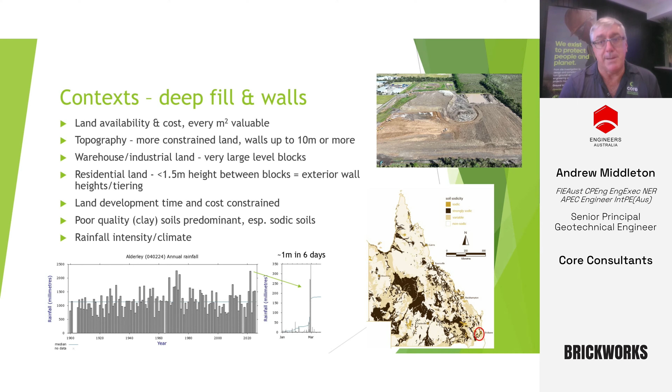With infill, typically you're building to your boundary, and we find that the land the toe of the wall sits next to is your neighbour's, not yours. So for walls in cut, the toe of the wall sits in your land — in both cases it's in your land — but in the case of cut, the land below the wall is yours, whereas in the case of fill, it's not. This changes some things that you, your client, or your owners can practically manage in the future.

So the types of walls we typically see used are cantilever, sleeper, or post and panel. Obviously panels are becoming more popular than sleepers. More traditional, I suppose, is the cantilever concrete footing with blockwork or bin sill systems.

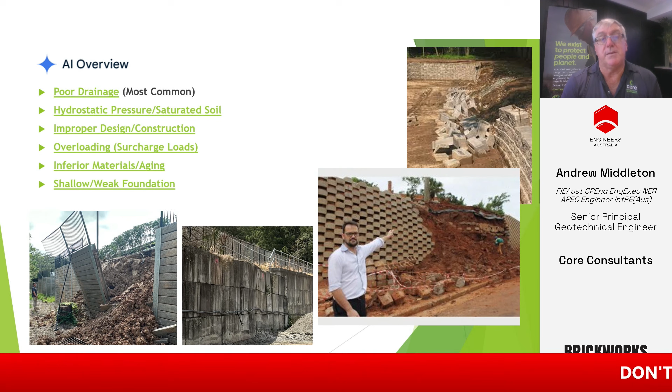So if you want wisdom, you just go to AI, of course. Here's a summary of what the internet says — poor drainage, I won't read them all out, but at least half of the causes are related to water, whether surface water or groundwater. Then there's design and overloading, whether intended or missed in design, and materials. Typically though, water is by far the major cause.

You can see a couple of little failures there, and that gentleman — actually not from Australia — is a politician, and you can see he's educating all of us about a big wall failure. Slow news day, perhaps, I don't know. Anyway, it will make the news, and we don't want that to happen.

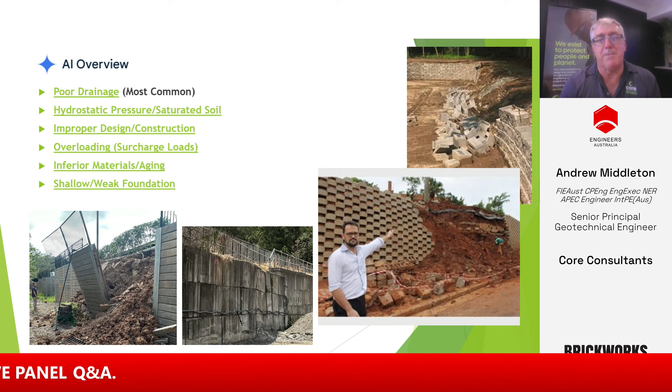Wall design is not simple, it's not easy, and it includes an interaction between both structural elements and soil. It's quite a significant bit of engineering work, and as you get big walls, you get very, very big loads. I think these are amongst some of the most significant engineering structures that get built.

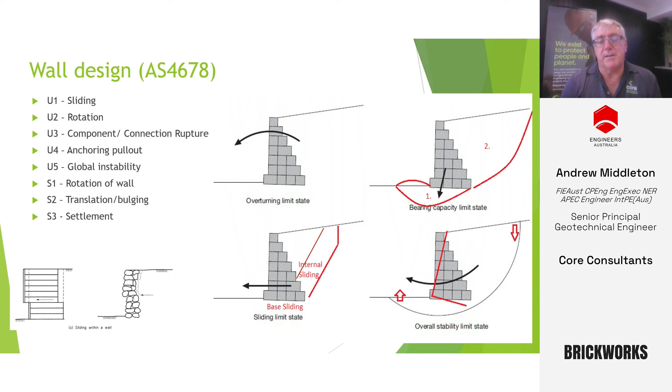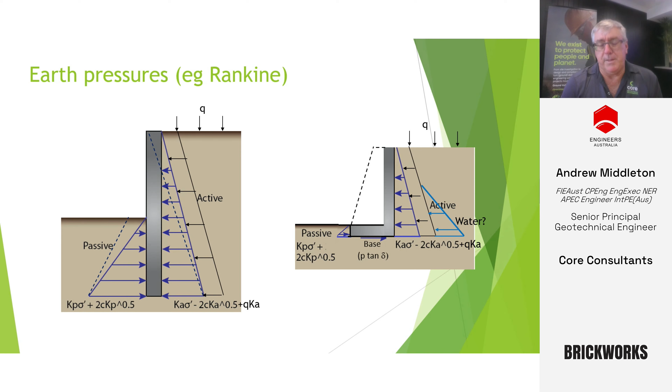Again, just basic earth pressure theory — passive pressure on the leading side of, say, a cantilever wall, and active earth pressure on the back, provided the wall can move. If the wall's restrained from moving, you'd use at-rest pressures, which are higher. There's an increase due to surcharging and whether or not there's water. At a high level, typically for mass gravity type walls, you've got sliding to consider — nothing new there, just a summary of what we've got.

One of the things about FARs is we often get to do testing, and my guess is it's 10 times the testing you would do for the original investigation and design.

As I say, we have to be careful about judging others in retrospect, because with the benefit of both hindsight and lots of testing, it's easy to do that.

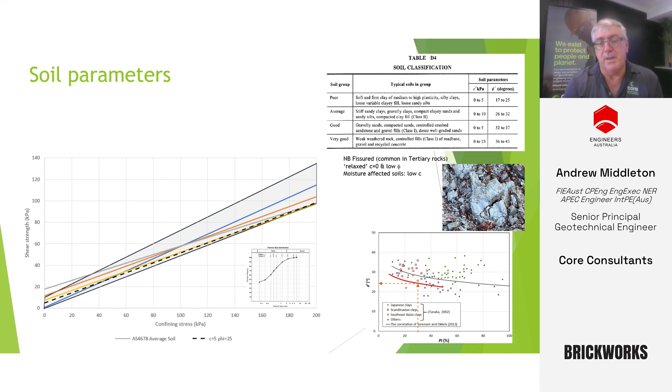Of course, the benefit of high soil suction is it gives you high apparent cohesion. A lot of embankments and cut slopes stand up in the short term because of these suction pressures. But as water becomes available, the suction will draw in water, dissipate, and there'll be a loss of that apparent strength, apparent cohesion - you need to account for that.

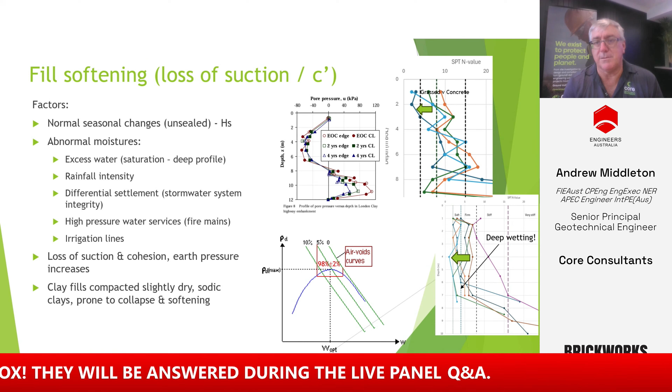Fire mains are a major contributor to problems in clay fills. Again, differential movement as earth pressures take up potentially leads to that. There are circumstances where there's been unmonitored water use in the fire mains and significant volumes discharged over a period of many weeks, and it only became evident when the wall had a problem that something was going on.

As I've said, with increasing moisture, you get loss of suction, your earth pressures go up. You need to either reasonably allow for that or try and ensure there are measures in place so it doesn't affect it. I've mentioned the clay fills, sodic soils.

What was also really useful is they monitored, they took readings as a very diligent client wanting to ensure they didn't affect their neighbour. We found it was about 100 days for those movements to fully develop - that's the dissipation of the soil suctions. In terms of earth pressure theory, that's the development from at-rest pressures up towards closer to the active pressure, and that's the wall taking up and the soil relaxing.

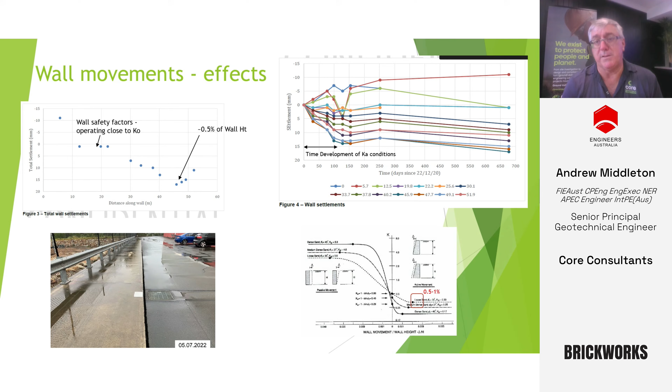So this has been really useful to show us that walls shouldn't move more than 0.5% because of safety factors, but they can move up to 1%, and that's a real number, and it will happen. Occasionally, because of suctions being maintained, you won't see very much movement. You get comfortable with that, but you need to be aware that they do happen. It's a real thing, so if we put it that way.

And of course, with movement, stormwater pipes are prone to movement, fire mains too - we're going all over that. Stormwater pipes are obviously bedded with bedding gravel and they're large diameter, so they are great big subsoil drains. So we strongly recommend using an ag drain in the bedding gravel that discharges into the access pits at the end to the shafts.

Blinding of that layer - I think I would probably, if it was a high risk situation with the potential to affect a wall, I would recommend blinding as well, just to help do everything you can to mitigate the risk of movement causing opening up of joints.

So remember, vertical settlement will happen anyway - that's just normal. Well compacted clay fills settle upwards of 0.5% of their thickness, potentially up towards 1% of their thickness anyway. If the shaft's bedded down at a different level to the pipe, you're going to have differential movement.

So the other thing is the potential to use smart technology to monitor water use and have some sort of alert system. Maintenance people aren't necessarily aware of why this would matter, but having alert systems that indicate, say, a fire system or an irrigation system is using an unusual amount of water, and that going to people who know what it means, investigating those issues quickly and promptly and dealing with them.

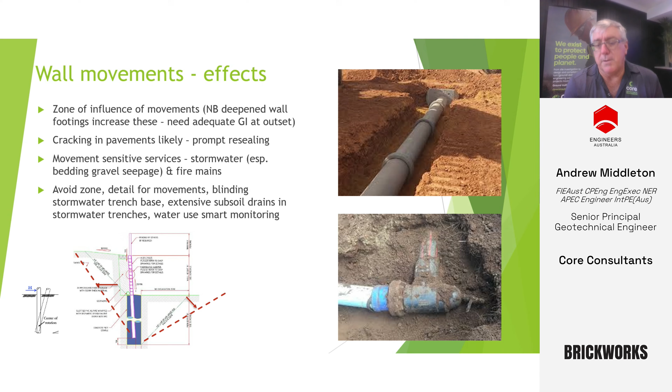I think the other aspect is ensuring when there is movement at the surface, those joints which might be in pavements or opening up of joints in concrete, that those are promptly dealt with.

It's quite popular to adopt this system where there's a facing rock, which could be cut sandstone or boulders laid in a compacted and neat way, but then to substitute a backing rock behind that. The idea being the backing rock provides a lower pressure than the soil, and it helps resist sliding. It provides mass for overturning stability.

It becomes really critical once you get up above the size of blocks - sandstone blocks or boulders - that you can practically manage with most machines, and given the constraints of construction site access and truck movements, once you get over about 4 to 5, maybe 6 metres, we find the statics really start to struggle, and you've got to do other measures, or really carefully engineer and think through how this is actually going to work.

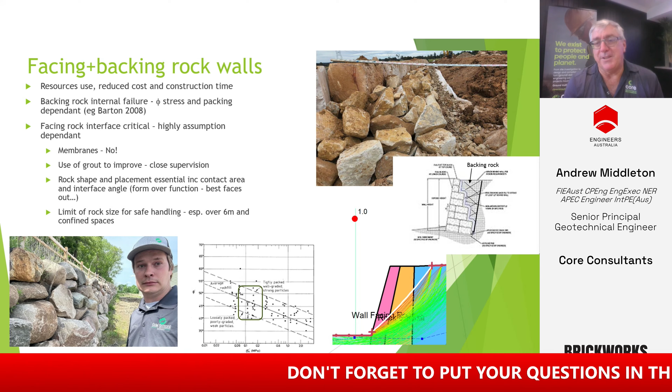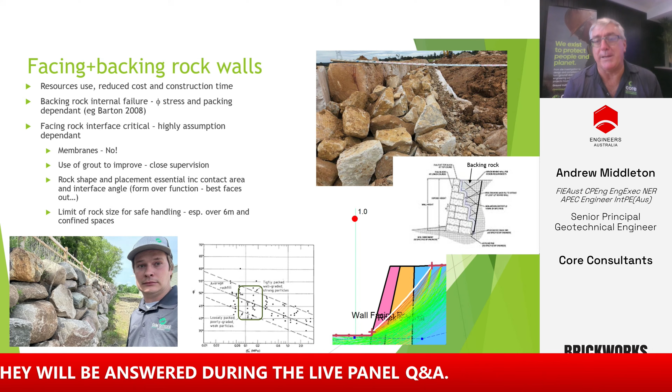There is an example I have seen where a geomembrane, HDPE, was placed between rocks. I probably don't need to say, but friction doesn't work very good on HDPE. So I think that was kind of an obvious one, but nobody picked it up, and of course it was found out first - rain found that one out pretty quick. Fortunately, during construction, it was never going to last. So simple things like that you would imagine are obvious, but maybe not so much to others.

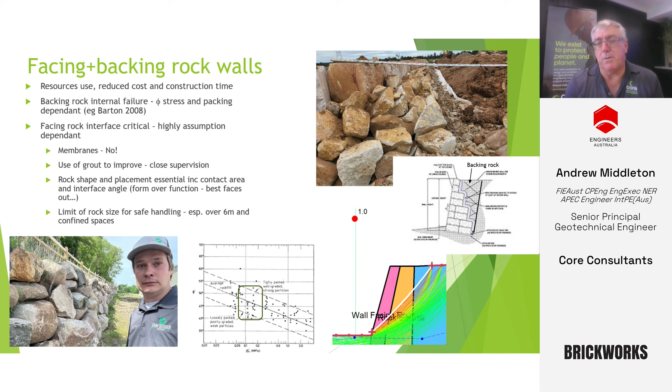I've also just shared - I found Barton produced a good paper on rock fill density and friction angle. It shows some variation for different confining stresses, so obviously you get higher stress. This is from rock fill dams. I found that quite a useful way to have a more informed decision about what parameters you should use if you're going to use this rock fill method.

I mentioned settlement - this is one of the serviceability conditions. We see this a little bit more often than we really would like. Typically, this is a circumstance where we've got a hard structure like a stormwater treatment, detention, or treatment tanks, or access shafts in a smallish gap. Around shafts, we can't put obviously large machines, so we're using small compactors. Productivity of those rollers, you can imagine, is not high.

Obviously, very strong preference to use fill on the dry side of optimum because it's easier to compact. You can see there's an example showing where the permeability of that fill rapidly increases once you get up around that 10% voids, which is what you're looking at if you accept 98% with a -2% moisture. You're probably talking those kind of numbers, and you see how rapidly the permeability changes after that.

Sodic soils are especially sensitive to this. They will also do that.

On the right there, you can see a real project where settlements are - that's a long time plot. You can see it's perfectly, after an initial period, perfectly tracking for a long time, a creep settlement behaviour. It's in a pavement. That's obviously taken some management for that, but it's heading for 20 years for a pretty good size, so a fair bit of asphalt will be needed there.

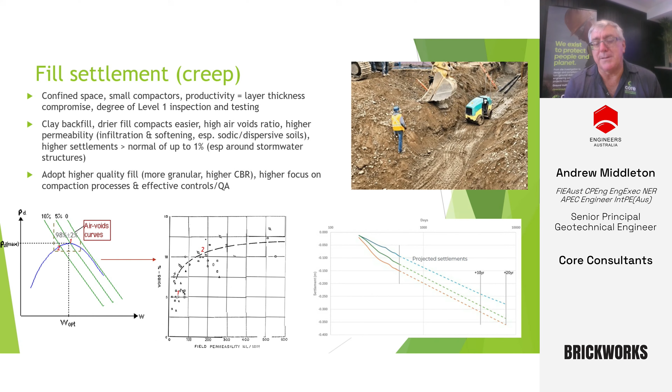So most walls, big walls particularly, are probably going to have a sag point. That's just following topography - there's going to be a low point somewhere on the site, and that sag point obviously is probably not going to be available to stormwater infrastructure, because you're draining the top of the site, not the bottom. So where does that drainage water go?

Discharging it out onto your neighbour's property is a bad idea, but that's what we see a lot. Allowing it to pool in there, down at that level, that's not a good idea either. That allows softening of the subgrade.

There's an example there of quite a well-built wall, but unfortunately the subgrade conditions, clay, after being saturated for quite some time, just eventually gave up and had a simple bearing capacity failure because there was no proper treatment or understanding.

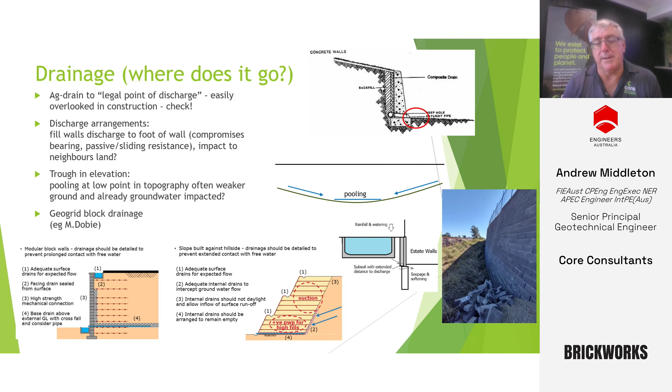The ground hasn't failed as a result of the ground capacity. So I think the issue we're starting to see is, a bit of theory on lateral capacity of piles: short pile failure is where the ground capacity governs. Long pile failure, this is Broms' theory, is where the moment capacity of the pile is the governing capacity, and that's where the pile yields in moment.

Commonly 150 or probably 200 UCs are used, maybe in a 450 diameter pier. The bending capacity of those is very low. And if you then apply that into Broms' long pile theory, you're going to find that the capacity of that pile is very, very small compared to the earth pressures.

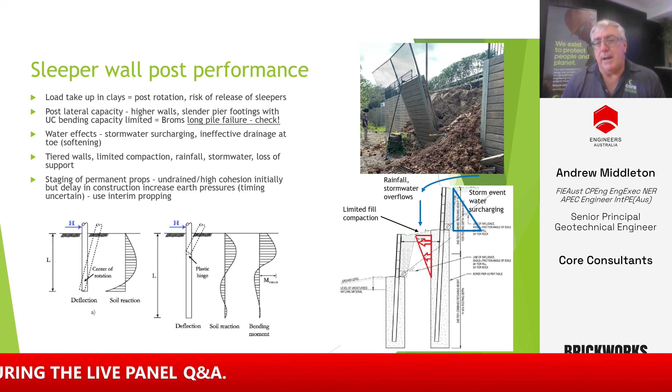Where that starts to become even more of a concern is in a tiered wall, where the upper wall's doing a lot of work and may not be getting a lot of support from the ground, the backfill behind the lower wall may not be very good. You can imagine what happens: the position of maximum moment moves down, the moment goes up because you've now got a longer moment arm, picking up more earth pressure load. Things could go bad quite quickly in that respect.

I'm not a structural engineer, but I really think there needs to be more thought given to full cage reinforcement for these piles to significantly increase their capacity.

Tiered walls, the other thing we have seen is stormwater. A number of these walls have problems during construction, often because of uncontrolled discharge of stormwater going to the walls, down the back of the wall. The drainage systems behind the walls are designed for seepage, not for stormwater.

Secondly, for example in a tiered wall, if it overtops, you're softening the ground in that middle tier, which again probably hasn't been able to have very high or effective compaction. So I'd say with tiered sleeper walls, that upper tier particularly, don't miss it. Really need to engineer that really well to account for these kinds of conditions.

One other thing we have seen is a situation of a cantilever wall which has a permanent prop in the form of the slab for the structure, from the pavement, using it as a permanent prop. But in the interim, during construction, there was no prop applied. As delays in construction occurred, the wall moved well beyond its capacity, the cantilever started to move, and emergency propping was needed there. I think, to me, if you need propping, you need propping.

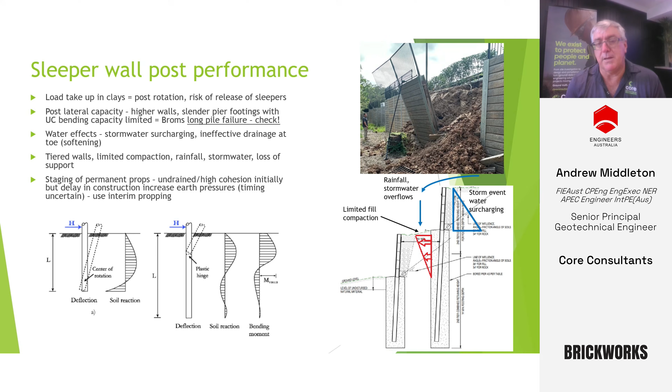So just in summary, things I think are just better practice principles. Drainage: understand where it goes, make sure it gets built properly. Don't just say, don't have a lack of diligence about that. Really, that's such an important factor. It doubles the load on a wall. Earth pressure combined with water pressure is the same as, probably more than, earth pressure in some cases. So make sure you get that right.

Water services are critical, particularly fire mains and major stormwater. They are high risk. You need to make sure those are really thought about in detail. Move them away if you can.

If you can't, put in these other measures. Surface water during construction, as I've said, you must divert surface water. It must have arrangements to avoid the walls - walls are not intended to cope with that. Sleeper walls, long pile failures, as I've just said, check them out. Make sure you're comfortable that you've got that covered.

Tiered walls, obviously numbers of issues there, potentially things that you can't control, need to be kept in mind. Rock walls - the facing rock method - I think practically there's probably limits to what's doable with what's sizable, after which I would probably say think about going to engineered type block systems, GeoGrid for example.

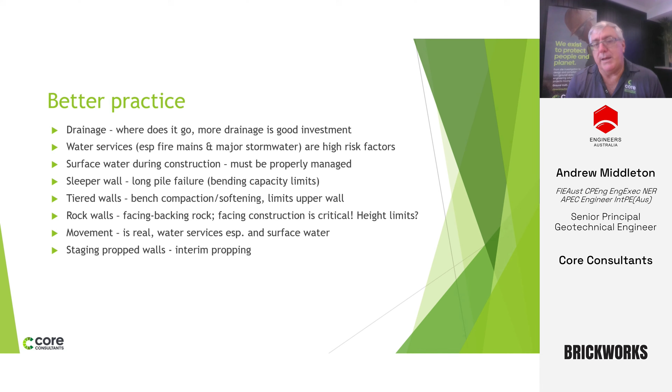Lateral movement is real, and again settlement, compaction - looking at what you do to try to help ensure you've got better compaction around structures when you've got the wall and near wall, particularly back of walls. And again, the staging, as I said, interim propping.

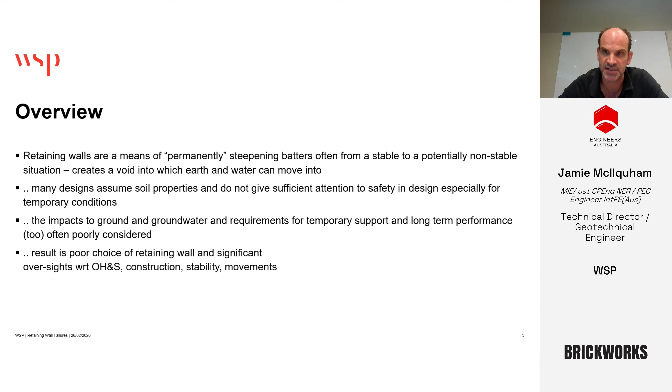So just as a general overview, retaining walls are constructed to permanently steepen the ground. In doing that, we can move ground from a stable initial state to a non-stable situation, because essentially we're creating a void into which the earth and water can move. Now, many designs have to assume soil properties. Some don't give enough attention to safety considerations, particularly for temporary conditions where walls may not be the permanent structure. The impacts to ground and groundwater from temporary or even long-term support are often not well considered. The result is people can make a poor choice of retaining wall, and sometimes design can have oversights in terms of safety and construction - the key things being the stability and movement of the excavation.

Now, there are different retaining wall types. Andrew has already covered some embankment walls, where we're generally building up from existing ground. I'm going to focus a bit more on excavations, where we're cutting down into existing ground. There's different considerations for both wall types. For fill embankments, generally you have more control about what the wall is being built from, and so potentially they should be easier than cut excavations. However, even for low height walls, you do need to be careful to give them the attention they warrant, because you can still cause some major issues, as Andrew's discussed, with embankment walls.

For cut excavations, there can be issues - it is a relatively high risk construction activity. The material we're retaining is going to be variable. It's natural, we won't know perfectly what's there, and the properties can change with time. We do have to often deal with groundwater, which poses challenges, and we'll go through some of those considerations later in this presentation.

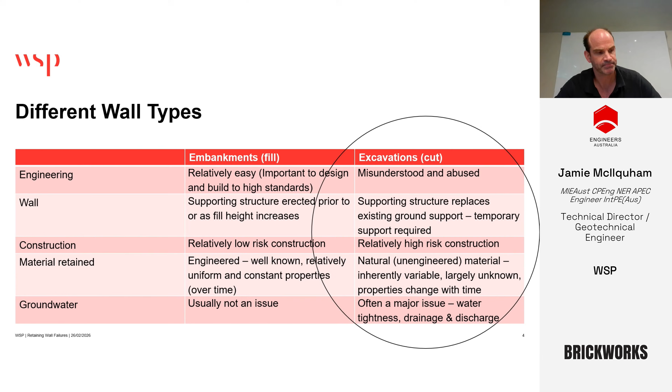There is very good guidance for embedded wall design. CIRIA 760 is a very good reference for anyone working in this field, and will cover in great detail a lot of the considerations I'm going to walk through in this talk. So I'd certainly encourage anyone doing this type of work, or who wants to do this type of work, to obtain and work through that guidance document.

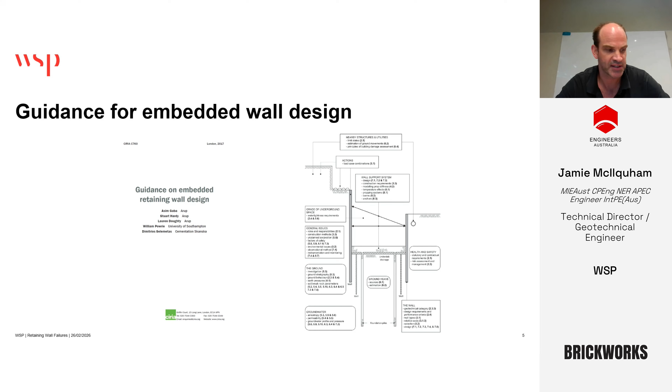As we've touched on already, embedded walls are a risky business. You are creating a void where the soil and water can move into it. Some of the failures that have occurred include partial or full collapse of the excavation. There can be movement of the wall itself, and then if there's any structures or services nearby, they can also move. Groundwater inflow, depending on the ground you're in and the type of wall used, can be pretty serious. And if water does start changing and you have an impact on the groundwater regime outside the excavation, that can then cause other issues for any nearby services or structures. The forces involved are very large, and there's significant consequences if we don't get it right.

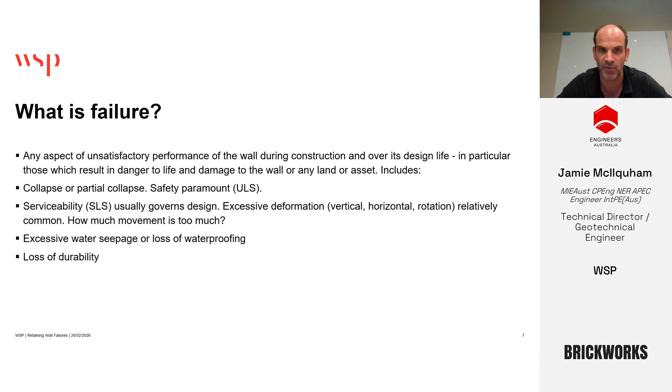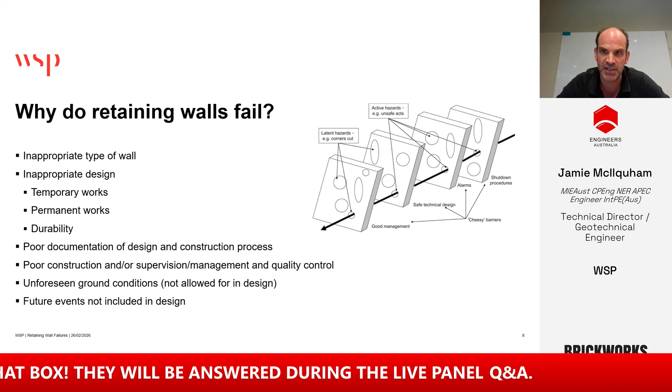So some of the reasons a retaining wall might fail, from a high level, would be an inappropriate type of wall chosen for the scenario. It might be a poor design, either for the temporary or the permanent works. There could be durability issues with components used to make the wall. Sometimes there could be poor documentation around the design and/or construction process, poor construction practice or poor supervision and quality control, potentially unforeseen ground conditions that haven't been allowed for in the design, and finally things could happen during construction or operation that haven't been allowed for in the design process.

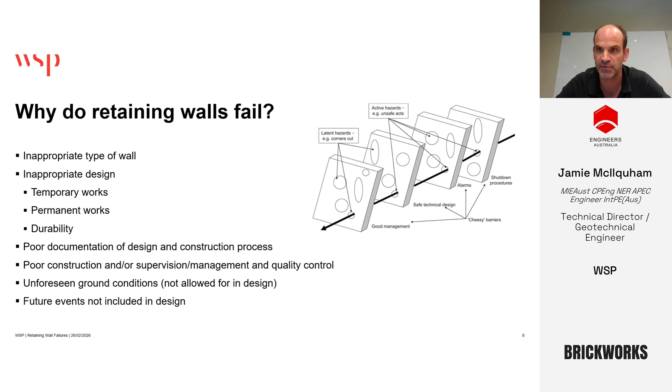Now, some of the things we do need to consider when we're choosing which retaining wall to use: the design function or requirements. Is it a fill embankment? Is it a cut that we need? What durability requirements do we have? Where's the wall located? Is it temporary or permanent? What design life are we trying to achieve? The stiffness of the system, how can the wall move and what impact do we need it to have on nearby assets? And water tightness, so what are the requirements for that? Where is the groundwater level and what do we need to do?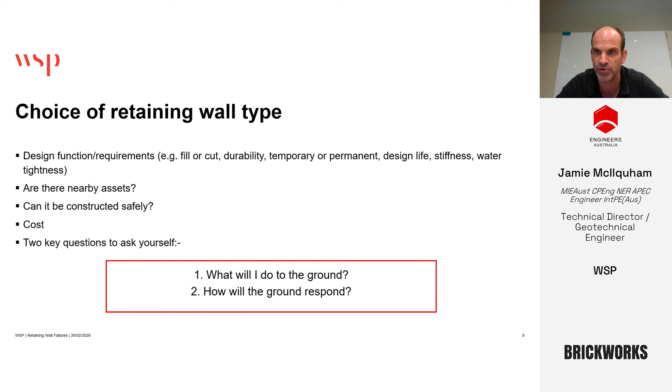Key questions mentioned before: are there nearby assets? Can it be constructed safely? Cost is obviously a major driver in a lot of circumstances. And really, overall, the key questions that I would ask myself if I'm thinking about retaining walls is, what am I going to do to the ground, and how is the ground going to respond? If you can answer those two questions, then you're a good way towards a good design.

So the first question: what will I do to the ground? Some of this will be going back to basics in a lot of ways, but it is important to get those fundamentals right. If we excavate into the ground, that process is unloading the ground. If we're filling for a retaining wall above ground, we're loading the ground. Both of those will result in good things and bad things. So positive things: there'll be some stable ground movements due to stress changes. There could also be some unstable movements because we're steepening the slope, and we may have some near vertical faces that need to stand up.

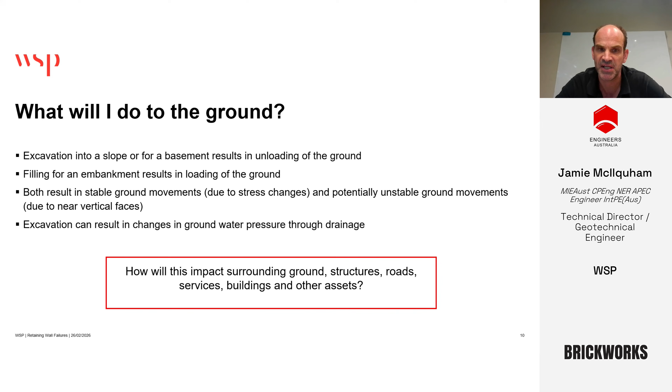Excavation can also result in a change in groundwater pressure through drainage. It depends on the type of soil, depends on geometry, but changes can occur. So how will these impacts affect surrounding buildings, services, roads, and other assets that may be nearby? That's a key thing we have to assess.

How will the ground respond? Will water or soil move, or become unstable as a result of excavation? Will there be changes to the groundwater flow regime? What does that mean, and how much water is coming in? Will there be drawdown outside the excavation? Some of those impacts from groundwater can be significant, leading to piping, liquefaction, or broader ground consolidation, and they can impact areas quite far away from the actual excavation. So it does warrant careful thought.

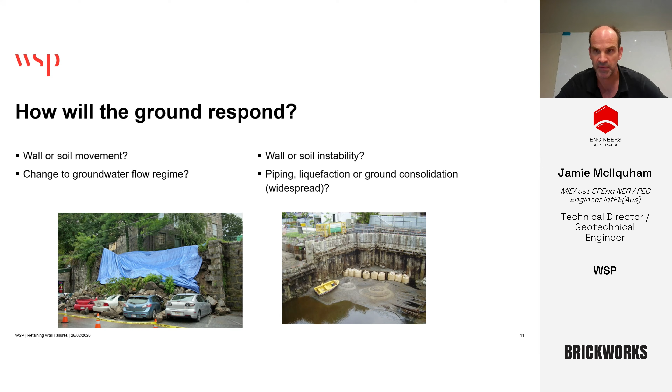There could be a river nearby, which can result in changes to both surface and groundwater levels, so things can quickly get quite complicated, and we need to keep that variation in mind. Often we won't have a large number of boreholes with which to do the design, and there may be restrictions on where they can be carried out, such as needing to work within an existing building or not. All of that needs to be pulled together to get a good understanding of the geology and the ground model before we get too far.

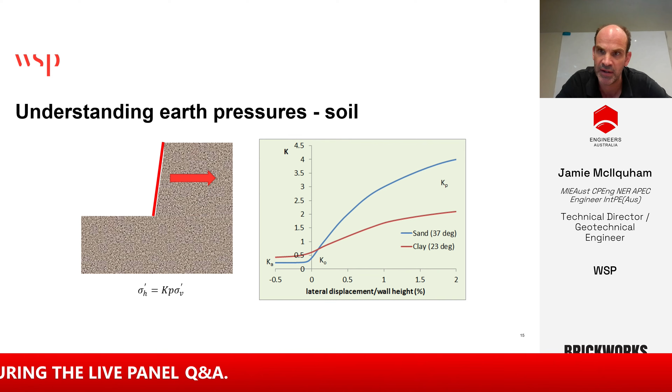The alternative is if we have a wall that moves towards the soil, then there will be an increase in pressure, meaning we move to the right-hand side of the graph, and again, depending on the soil type, there'll be a change in pressure. You can see on the graph that quite large movements, even larger than some shown here, may need to occur before we mobilize that force. So understanding the response of the ground and what movement is needed to generate those forces is a really important factor, and that's something that has occurred in some of the failures we'll talk about later for embedded walls, particularly with sensitive assets close to the excavation itself.

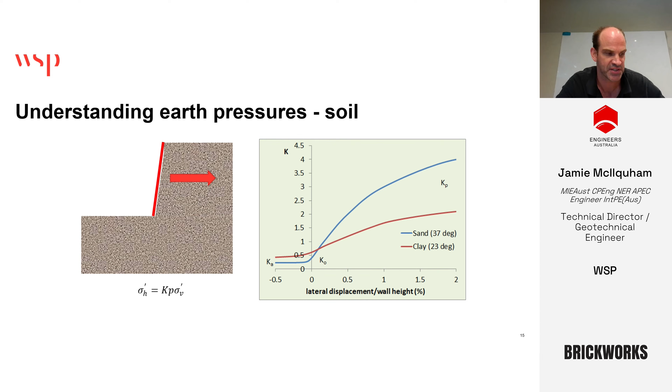Some other fundamental assumptions we bring into retaining wall design are around soil strength, stiffness, and earth pressure. As we've talked about, K0 is not a soil property, it depends on the stress history of the ground and the geometry we have. It will be between Ka and Kp, and K0 is not usually known. In soils, because they have relatively low stiffness, usually quite large movements may be needed to change the stress state, as we just saw. We'll need some movement to reduce the pressures down to Ka if the wall is moving away from the soil, and very large movements to generate passive pressures if the wall is moving towards the soil.

The bounding properties can usually be reasonably estimated from drained strength parameters, though this needs quite high quality strength testing to be carried out. The other method commonly used is to use correlations from other tests, like plasticity of clay. But once you get into very soft or soft clays, you do need to be careful in assessing those values.

When we're assessing earth pressures, we do need to be careful about using cohesion. It can be quite variable and will dominate the strength at low depths. If you use large cohesion values, the excavation may theoretically be able to stand without support, and so you may be designing with a relatively low pressure assumption.

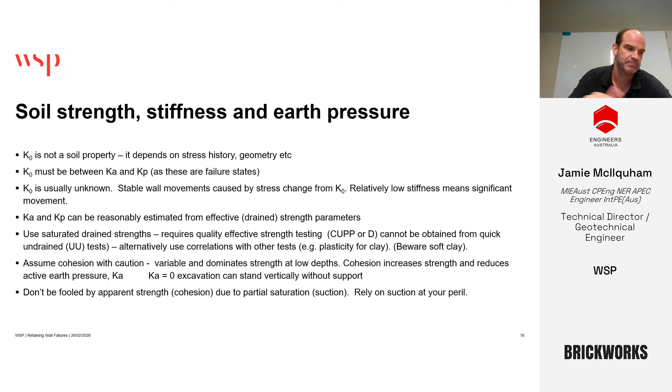If we move on to rock, often excavations will pass down through soil into rock units. K0 isn't a property, or the pressure within rocks is not necessarily a property similar to soil, and it can vary with direction and location.

In Melbourne, there's a difference in some of the pressures within the siltstones, with a higher stress in the east-west direction compared with north-south. In Sydney, it's different again, with higher pressures than in Melbourne. There can be some quite high locked-in stresses in the sandstone in Sydney, with larger forces generally being in the north-northeast direction.

Those pressures will result in movement. The benefit with rock is that it generally has a higher stiffness, so maybe smaller movements than we would have for an equivalent situation in soil.

However, things to be careful of in rock is that it's really the planes of weakness and the major structure in rock that governs its behavior. So we do need to understand the bedding of the rocks. If there's a dipping in the bedding, that's something that's really important in designing basements.

The soil-based estimates of Ka, Kp are probably not applicable, and there can be weak planes within rock, some of them sometimes quite low strength. So essentially, although you're working in rock, you're using strengths that are used in soil mechanics. So you can have weaker and higher earth pressures in rock than you would in a very soft clay in certain combinations.

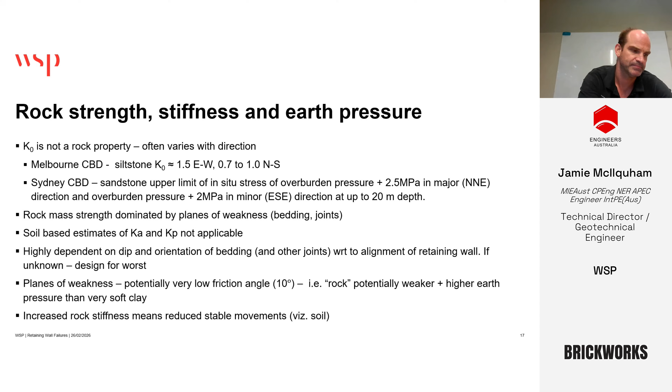And seepage or water flow has some significant impacts on excavations. So commonly what will be done is try to make sure you have enough drainage, both for surface water and groundwater, looking to try and seal the surface to avoid surface water becoming groundwater where you can.

Looking to achieve an adequate cutoff, so the walls of an excavation going sufficiently below the bulk excavation level to control the rate of groundwater flow into the excavation, or sealing into an impermeable strata in some circumstances. If that isn't done, there can be quite large-scale impacts from the excavation that can impact other assets. You do need to think about whether active pumping is needed to help bring down the groundwater level, or whether you just need some pressure relief in the base of an excavation.

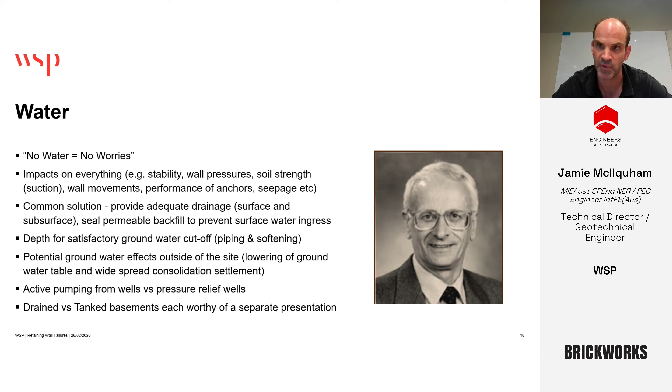Drained and tanked basements are both worthy of a separate presentation, but you do need to think about, for each of those situations, how the excavation will be sequenced and what the impact on groundwater will be. A topic on its own right.

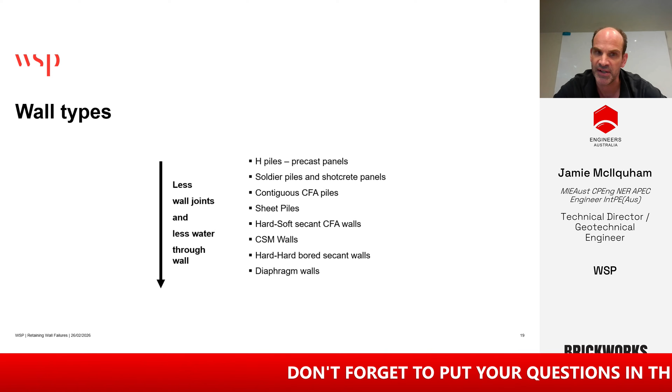Now, depending on how we want to try and manage water inflow into our excavation, there are a range of different wall types that can be used. There are some examples and case studies a little bit later that go through some of these. And as we move down the list that's shown there, there are fewer wall joints and less water will be able to get through the wall.

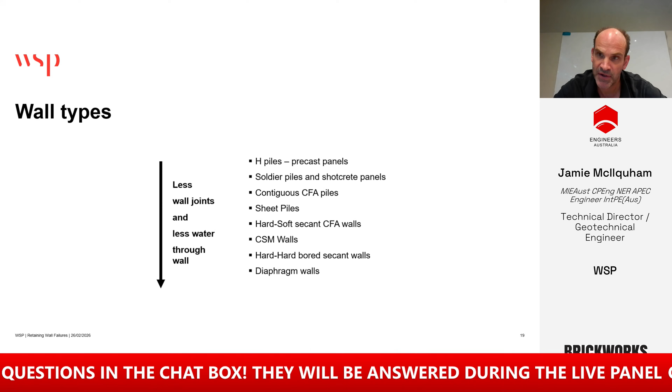You still need to work out where the wall is founded, and whether there's potential for water to come up from units that are below the wall. But in terms of flow through the wall itself, diaphragm walls are relatively tight. Some of the soldier piles and shotcrete or precast panel walls are relatively leaky.

So choosing the wall does depend on geology, depends on the water tightness you need, and it depends on the finish that the client is expecting.

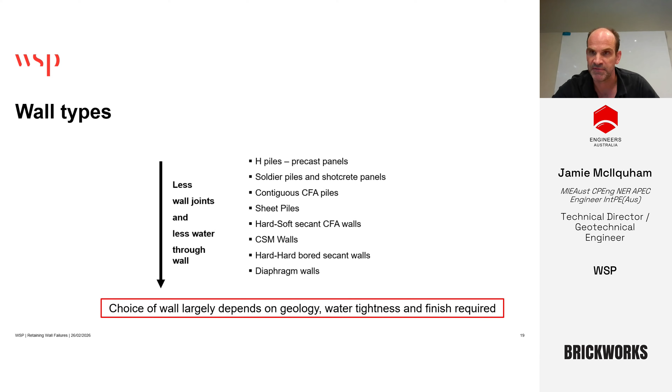Now, in terms of wall embedment, it's needed to achieve lateral stability. It's needed to achieve cutoff of water. It's needed for vertical stability, particularly if we are using ground anchors that are inclined. And base stability, again, that's tied to the water inflow into the excavation.

Now, when we specify a founding layer for the perimeter walls or for a retaining wall, a key question is, how do you actually confirm that you're in the correct strata during construction? Because it's important to think about the consequences if embedment isn't achieved, and that could impact any of the items above we've just talked about.

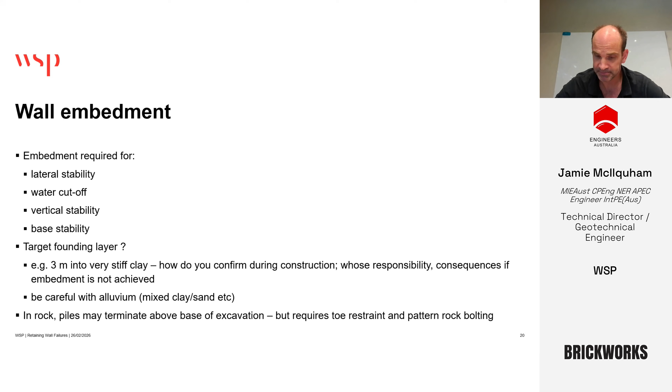You do need to be very careful in alluvial materials, which are by their nature very variable and saturated and can change quite quickly. In rock, piles don't necessarily always need to extend below the base of the excavation, but you do need to think about how the loads from those piles will be carried and how the rock below the piles will be supported.

Now, one of the topics that has led to basement failures, particularly with groundwater inflow, is around verticality of piles. AS 2159, the Australian Piling Code, does not cover retention piles, and there's no codified verticality standard for design. So do you warn your clients?

In doing this, we do need to think about pile spacing and what contractors can actually achieve in the field. There are some typical values here. Piling contractors may have their own thoughts on these, but here are some guidance numbers on what can be achieved typically. So for CFAs, typically 1 in 75. If very good quality work's being done, maybe 1 in 100. But there are quite specific factors that can vary what is achieved.

As we go to a heavier drill string, like cased bored piles, you may get higher quality verticality, as you can see in the numbers here. And D-walls, typically 1 in 100, can go up to 1 in 400, a bit like the cased bored piles.

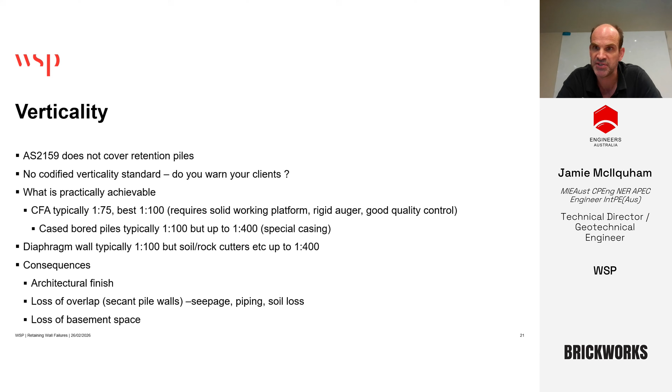The consequences of loss of verticality or misalignment can be architecturally, the finish doesn't look great in a basement. You can lose overlap, which can lead to water flowing between the piles, and that can lead to seepage, piping, or soil loss. And worst case, you could result in a loss of basement space, either through having to have facing panels with additional drainage behind it, or if there's redesign, as we'll see in some cases a bit later, you may not be able to go as deep as you hoped with your excavation.

So just an example here of a secant pile wall where we've got 600 mil diameter CFA piles at 450 mil centers. So we've got 150 mil overlap, and if we assume the verticality is 1 in 100, which is quite high quality piling, the amount of overlap we may still have depends on how deep the piles go and how deep the basements are.

So for a 1 level basement, we've probably still got about 90 mil overlap. 2 levels, we're down to about 30. 3 level basement, there's potential that we've lost our overlap. So typically 2 level basements might be okay, 3 potentially, but there's a chance you're going to get leakage after that level.

And so the other thing, often the piles will be founded below the basement level, and it's still important to try and avoid water flow through the ground below the base, particularly if you had saturated sands. So a comment there, what you can't see can't hurt you, but you may see increased water flow in parts of a basement.

The other thing that can happen with secant piles is if there's delays in piling between soft and hard piles, then that can also impact the verticality that can be achieved and the seal achieved between piles. So just something to think about when we're thinking about the piling method to be selected.

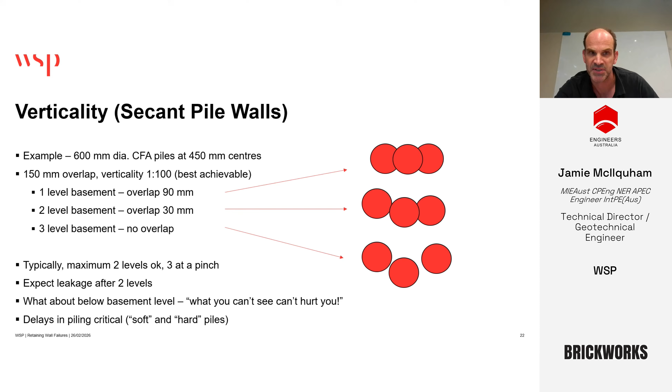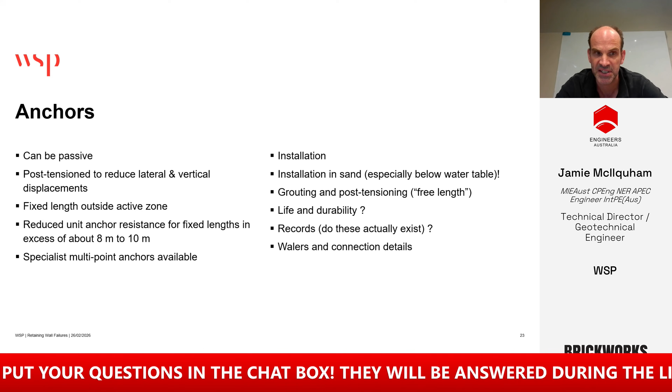Ground anchors are often used to support excavations. They can be passive or active. Quite often, if anchors are used, they are post-tension because that helps reduce movements. The fixed length of those anchors needs to be outside the active zone of the wall so that they are founded in stable materials. And once you go beyond about 8 or 10 meters in length, then the resistances that will be achieved are lower.

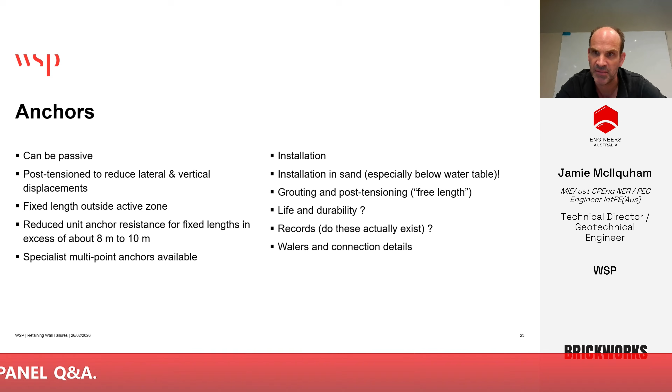However, there are single bore, multiple anchor options available that can be good if you're looking to try and spread the load over a longer length. Installation in sand, particularly below the water table, can be difficult. You may need temporary casing.

If you do try and install anchors without casing, then there are issues around having a separate free and fixed length. So we're looking to fix the anchors in at the end point of the anchor. If there isn't grouting in 2 stages, then potentially you lose the free length and you may be transferring load in part of the anchor that you were assuming does not, and that can lead to issues that we'll touch on a bit later.

The life and durability requirements for anchors, so how long they need to last, whether they're temporary or permanent. Records with anchors are varying quality. It is essential for anchors, particularly permanent anchors, that good details are kept of the drilling, testing, and finishing activities. And the waler and connection details that are used are also fundamentally important to their success.

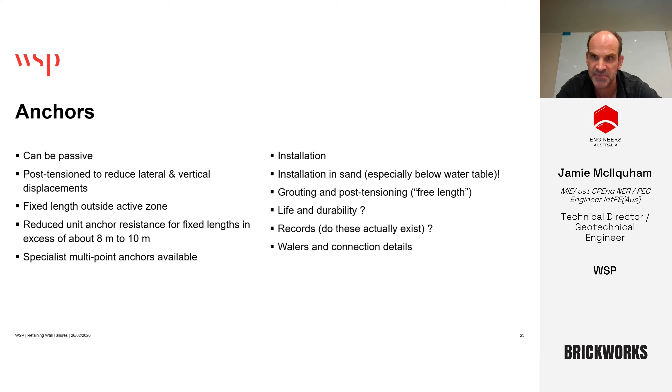Wall finish is something that is important to the client. It's what they're going to see when they walk into their completed basement. It's something that can cause disputes, particularly where somebody was expecting something but received something else.

Generally, picking a cheaper piling option or a cheaper retention option will result in a poorer finish. The different wall types we discussed earlier are cheaper to install, but they allow more water flow through them, leading to a poorer wall appearance. If you pick a poorer option, you may need a plenum wall with hidden drainage behind it, but you lose space in the basement as a result.

If the walls are out of alignment facing into the basement, you may lose space that you were expecting to have. Depending on the depth of the basement, more expensive options will sometimes result in a better finish and an overall better outcome for the client.

There's obviously water staining and leakage that could occur later in the life of the basement, and you need to manage and dispose of the water that flows in.

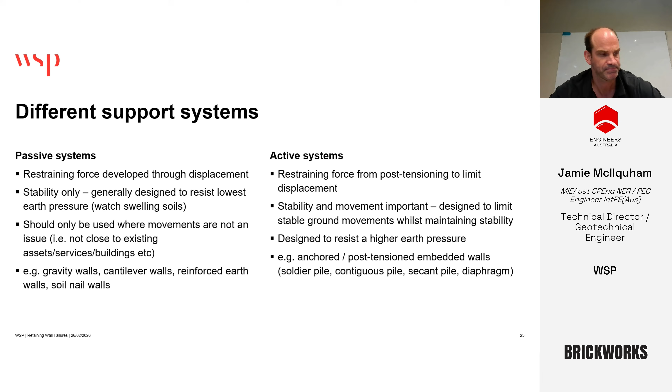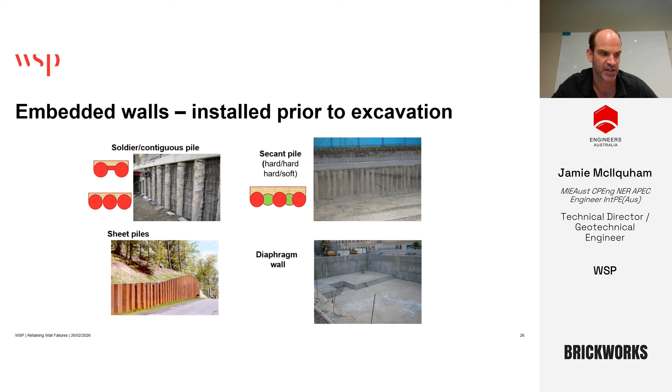Secant piles, either hard-hard piles drilled using casings or hard-soft piles. Sheet pile walls or diaphragm walls. So just some pictures of the different wall types.

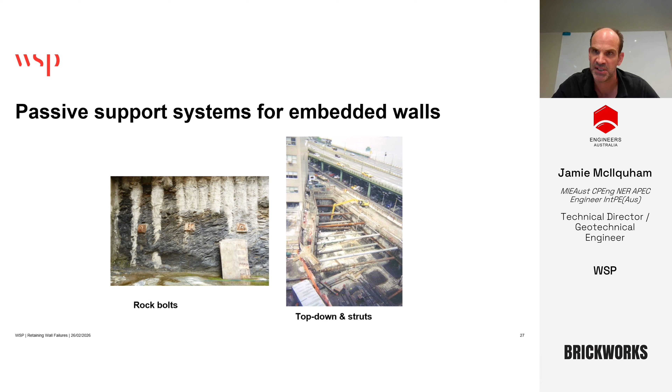Some of the passive support systems that I touched on a couple of slides ago: rock bolts will need to move in order to generate the force they're assumed to have. Struts, if they are not hydraulic or able to be pre-stressed, will be a passive system, and there'll need to be some movement of the walls in order to generate forces within those struts.

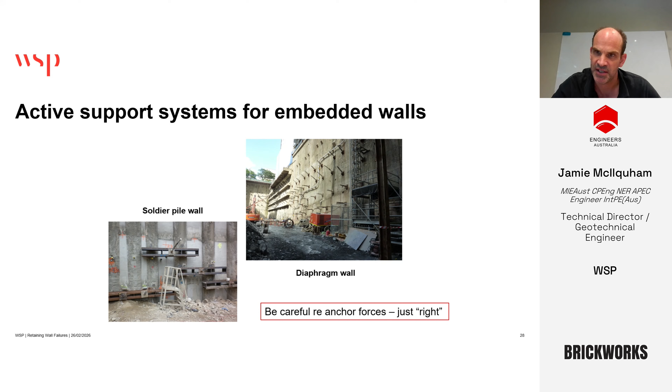Some examples and pictures of anchored support systems for embedded walls. In terms of anchor forces, you do need to be careful. If you adopt anchor forces that are too high, you can try to pull the wall back into the soil, which results in a move towards passive pressures and potentially higher forces acting on the wall. So it's important not to have anchor forces that are too high. Ideally, we get them just right, with a nice balance.

So some of the things we need to ensure during construction to make sure things go well: documentation needs to be detailed enough so people can build the wall as it's been designed. Specifications need to be detailed and targeted on what's to be done. And if there are key construction stages, it's important that they are clearly described and shown so people can understand the sequence that's been assumed.

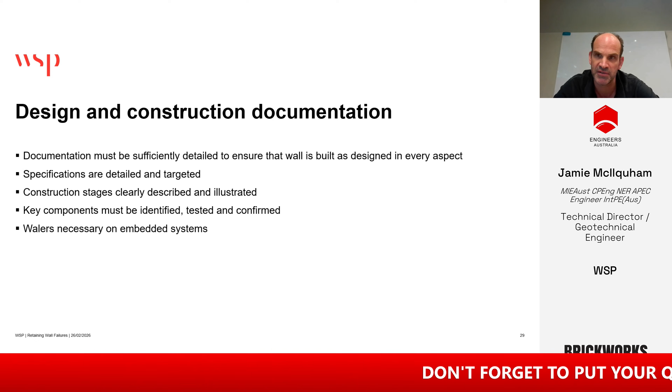Key components need to be identified, tested, and confirmed. Ground anchors are a good example—they should always be tested, and the records from them should be kept available as they are critical parts of the overall system. Likewise, pile construction records, toe levels, confirmation of founding strata, all really critical to the performance of the system. And walers should be used on embedded systems where anchors are used.

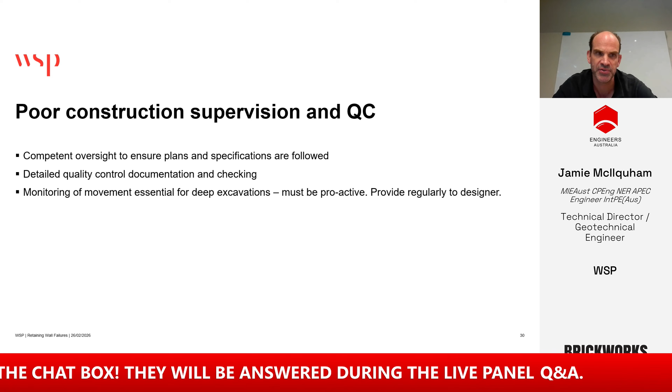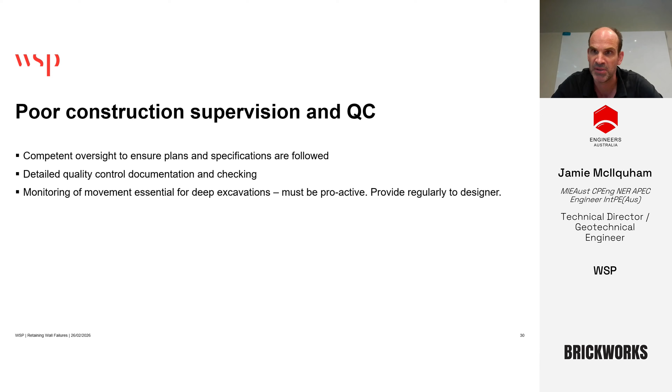There are issues if construction supervision and QC is neglected. It's important to have people checking that the plans and specifications are being followed, and that where documents are produced—whether anchors or piles—they are documented, checked, and accurate. Monitoring of movement is critical in deep excavations, and that should be proactive and provided to the designer so that unexpected behavior can be identified early and responded to. Ideally, there's a monitoring plan ahead of time to identify expected and unexpected behavior in order to take action to avoid issues, as I'll touch on in some examples shortly.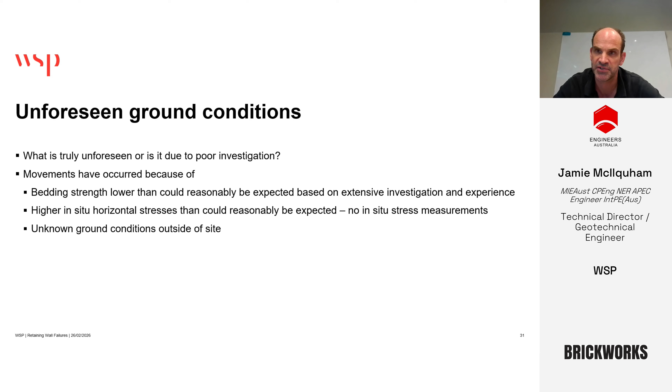Unforeseen ground conditions can lead to issues with retaining walls. But there's a question of what's truly unforeseen, or whether we've just done a poor investigation. In the past, movements of retaining walls have occurred due to strengths lower than reasonably expected—cases that are outside normal experience. You can have higher in situ horizontal stresses than expected, and what happens if you don't have any in situ stress measurements? There could be unknown ground conditions outside the site, or things have changed where you haven't managed to investigate. So ideally, you have a construction method that can be adjusted to capture those changes.

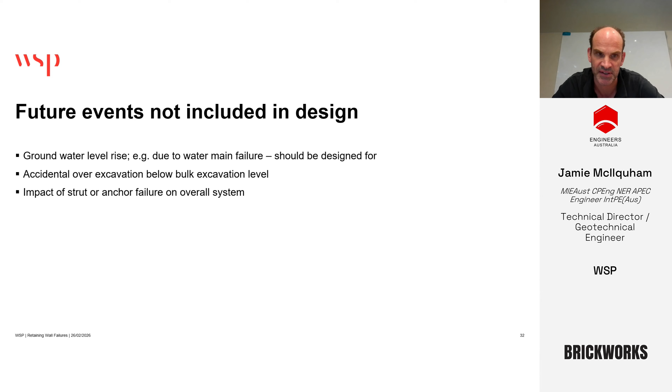I mentioned earlier that sometimes there are future events that aren't included in the design—it could be a water main failing near the site, resulting in a groundwater level rise, and that's something that should be considered and designed for. Accidental over excavation is something that CIRIA talks about. And then there's the impact of an individual strut or anchor failure on the overall system. Some of that came out of previous failures where the resilience of the overall system did not react well to loss of an individual component. So it's good to understand the resilience of the overall system.

Going to run through some examples here of projects, both in Australia and overseas, with examples of failures of retaining walls and generally what caused them. I've provided some information on each one, but not necessarily exactly where the site is.

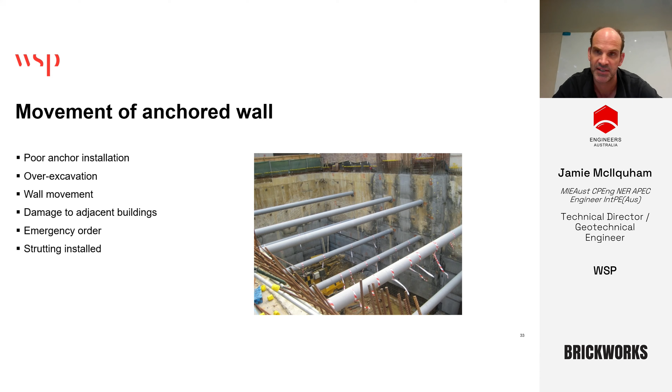There was one project where, as a result of poor anchor installation and over excavation, there was wall movement that led to damage of some adjacent buildings. Work was stopped and an emergency order was placed on the excavation, which was only able to recommence after temporary strutting was installed to help control the movements. Again, movement being a key thing, and something unexpected—the over excavation.

On another project, there was a soil mix wall—one of the options lower on the list in terms of water ingress, so quite a good option for that. In this example, there was a good site investigation and reasonable knowledge of the ground, but there were optimistic assumptions in the assessment of ground anchor capacity and behavior. It was a 2-level basement with a 6-meter retained height, and at one stage the toe embedment of the wall was reduced from 6 meters to 4.5. Bar anchors were used to provide support to the wall, installed into interbedded sand and clay alluvium.

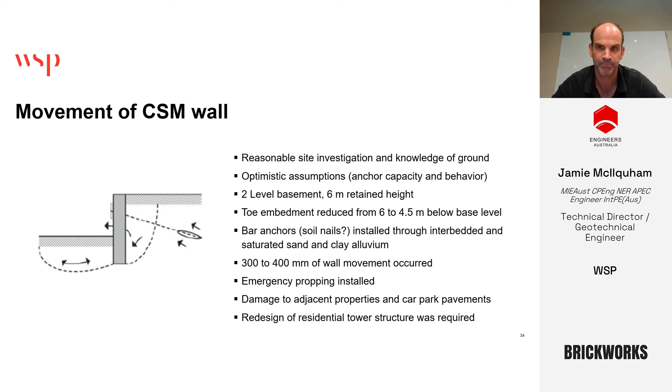This is an example of a basement in alluvium below the water table, similar geological conditions to the previous stage. There was probably insufficient investigation and knowledge of the ground in this instance, and some optimistic parameters used for soil, the anchor capacity, but also the pile verticality. As a result, there was insufficient pile overlap, and the pile embedment was too short.

There was significant water ingress and loss of base of the excavation. Anchor capacity was not achieved, and the walls moved, leading to damage to surrounding assets. As an overall outcome, the fourth basement level that was proposed originally was lost, resulting in impact to the structure, as well as damage to the adjacent assets, which had to be addressed by the project team.

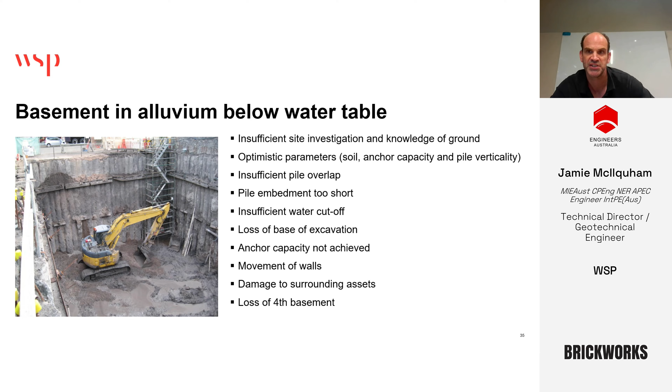One thing with inclined anchors is that in pre-stressing those anchors, you're introducing a downward force into perimeter piles. So we need to be very careful about the socket of those piles and making sure they're socketed into stable ground that can take the vertical load that will act on them. In this picture, the material below the base of the pile, possibly debris from construction, was quite poor. That can lead, and did lead, to settlement of that pile and anchor relaxation, so less force in the anchors, which can lead to increased lateral movements, as additional lateral movement is needed to put tension back onto the anchor again.

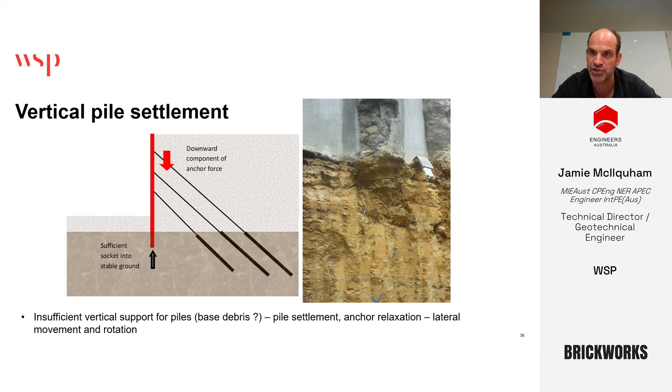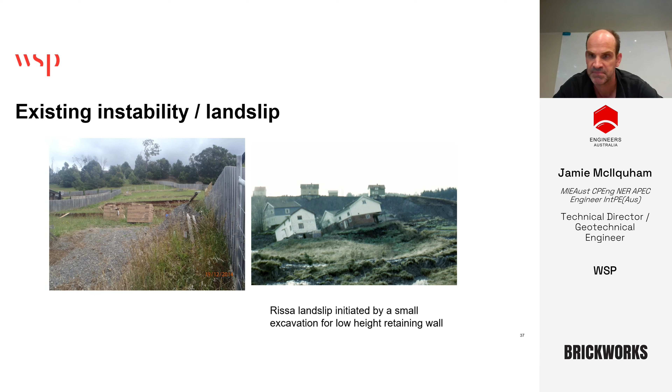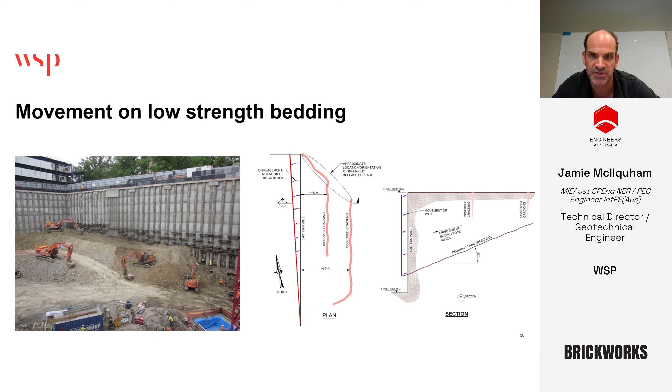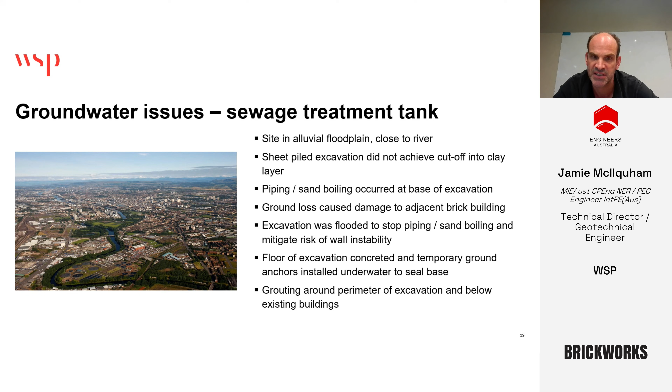Some fairly significant remedial works were needed. The floor of the excavation was concreted and temporary ground anchors installed to help stabilize the base, and a significant amount of grouting was needed around the perimeter of the excavation to help restabilize those buildings. A similar example from a contiguous secant bored pile project - again you can see the sand boiling in the left-hand image. This was a situation where there was insufficient embedment, or insufficient weight in the base of the excavation left, and pressure on a clay layer that led to loss of the base and remedial work being needed.

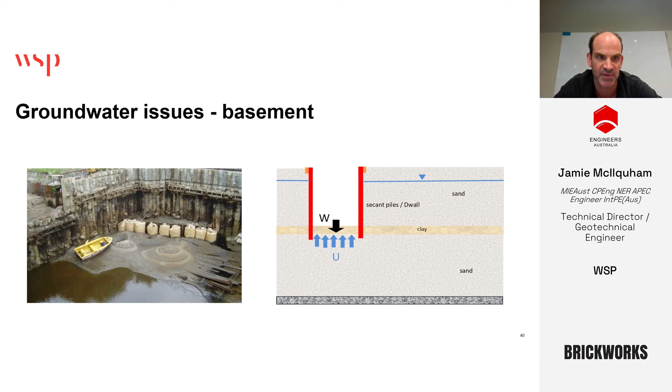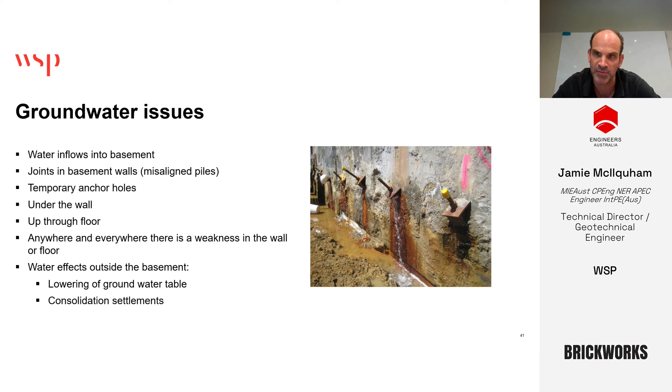More broadly, as we touched on the verticality, water inflows into basements are problematic. Water will tend to try and find its way wherever it can - so temporary anchor holes, joints in wall piles, anywhere really there's a weakness in the wall. That can lead to effects within the basement in having to manage that water, the visual impact we touched on earlier, but also impacts outside the wall. So lowering of the groundwater table can lead to settlement of adjacent buildings.

So some closing comments. Retaining wall failures are common. It's usually because of poor choice of the type of wall that's being used. It might be optimistic or incorrect design, lack of knowledge, potentially poor construction. It occasionally can be catastrophic. We had some pictures on the cover slides and also the old dock that collapsed. They're thankfully rare,

but the consequences that we're dealing with are high. So it's very important to understand the geological setting we're working in, how the groundwater conditions are going to respond, and what's around you. So if you're in an urban environment, there's a very good chance you have nearby properties, nearby services. So protecting those existing assets is really important in picking the retaining wall options you're using.

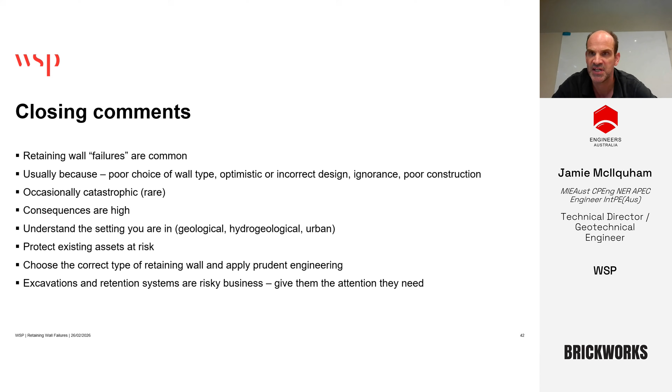Choosing the right type of wall is important. Being prudent in doing that and giving good advice to clients to make sure that their expectations are achieved. And overall, it is a risky business, and so please give them the attention that they need. Thank you very much.